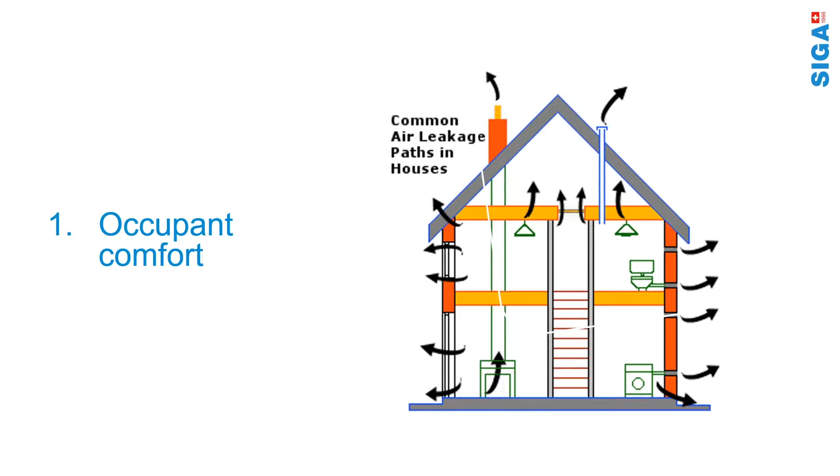Absolutely possible as well. So let's start with the question, why should you pay attention to airtightness in the first place? Okay, what are your benefits? What's in it for you? Why should you even consider doing that? The number one reason to build airtight is occupant comfort. Only if you live in an airtight house that is free of any drafts, you will have maximum comfort. So that's a very important, almost universal value, I would say, for any homeowner. He just wants to be comfortable and not feel any drafts in winter or summer.

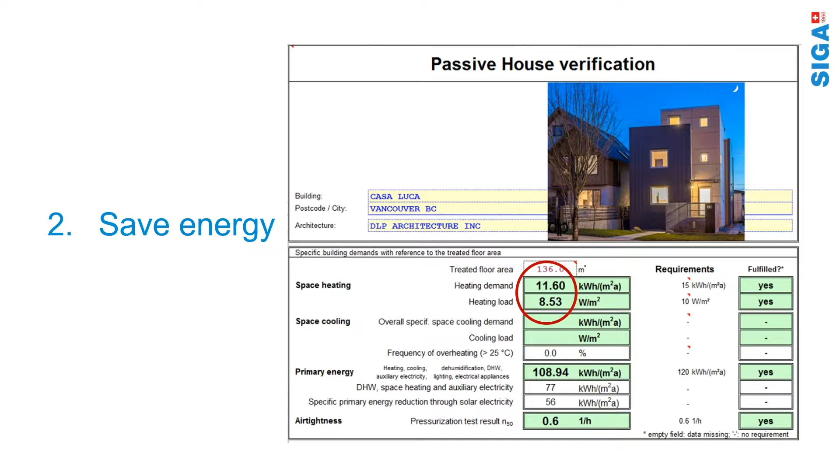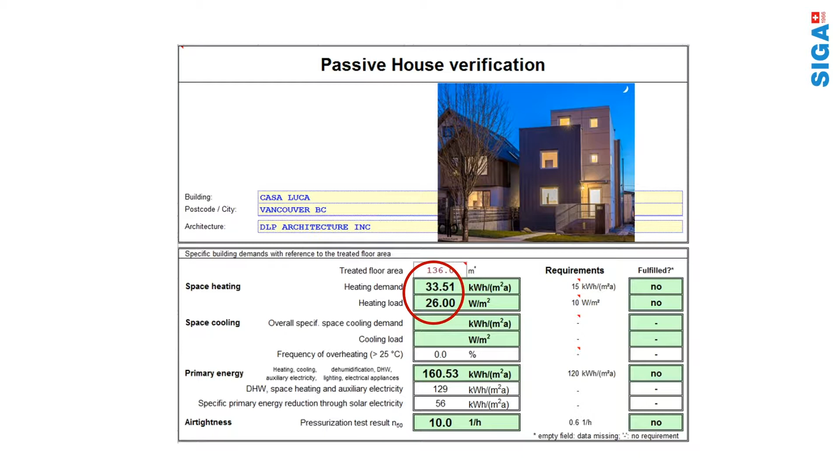The next reason is to save energy. Here we look at the energy model that was done for this house in the picture. And what the modeler did here, he wanted to show to the homeowner that there is an energy saving if he builds the home more airtight. Right now, this house needs about 11 kilowatt hours per square meter at 0.6 air exchange. So that's the passive house level. That's like the gold standard. Now, if we compare this to an airtightness level that is not as favorable, let's say 10, you can see with an air exchange rate of 10, we just tripled our energy demand for this house. So there is a huge saving potential if we build airtight.

Number 3, to avoid building damage. An important part of building airtight is to make sure we have no uncontrolled airflow through our wall or through our assembly. It can be a roof as well in general. Why does this matter? Well, very simple. With air, also moisture can travel into our walls. And if we have moisture that meets cold surfaces in our wall, we always have a condensation risk. And condensation will commonly lead to mold in the long term. So to avoid building damage of that nature, we will have to build it airtight and seal it off well.

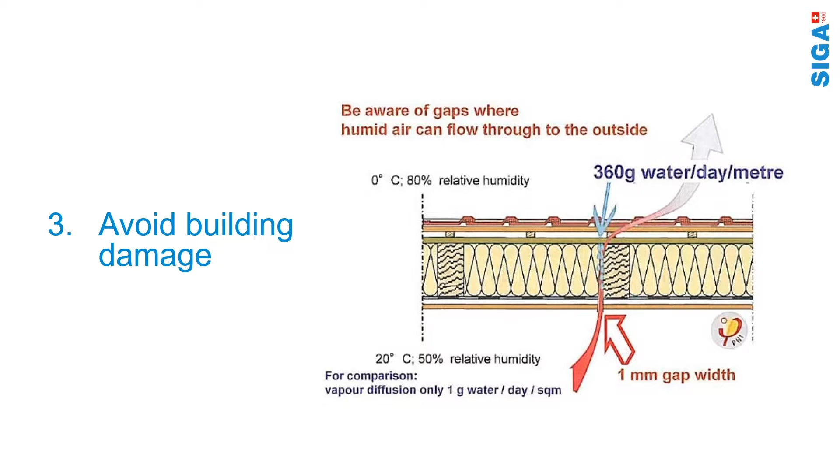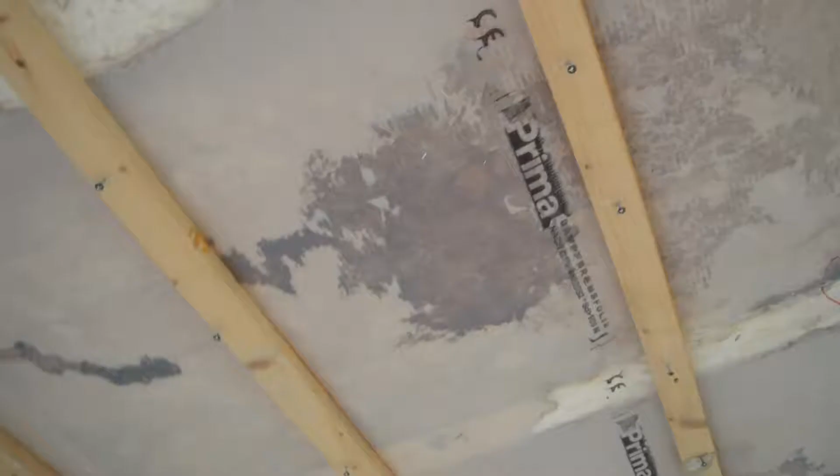Here we have another example of moisture. Here the reason is actually convection. So what happened here, this vapor barrier wasn't properly taped, and the warm air had a chance to get behind it and condensate, and we can clearly see all these water spots, wet spots.

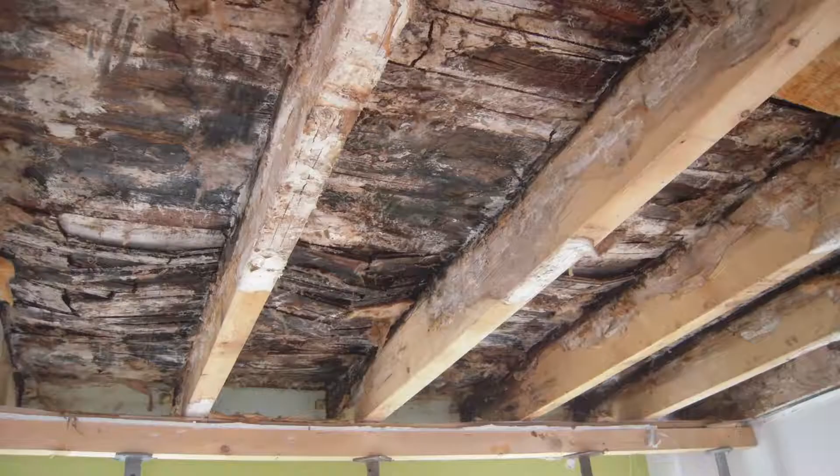There is a lot of moisture that got into that ceiling. What can happen is this, and that's a very severe example of an untreated moisture problem. Next, mold will follow, and with mold over time, it just eats away, it rots away your wood. You can end up being at a point where you're going to have structural issues, and then it becomes not just a health risk in terms of breathing, it becomes a health risk to even be in that building because it could collapse.

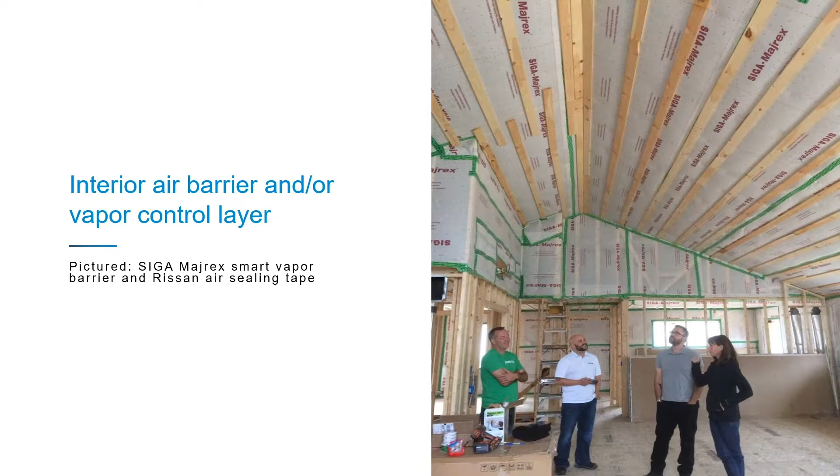So now, after looking at why it's important, let's have a look at how it gets done and what are ways to get your project airtight. One air sealing strategy is actually to address your air barrier from the interior. In this picture, you can see a white membrane called SIGA Majrex. This is a smart directional membrane that's used here to protect your walls from any warm, humid interior air. So it stops it at the source, and therefore is a great choice for all projects, for example, where you plan on using blow-in cellulose.

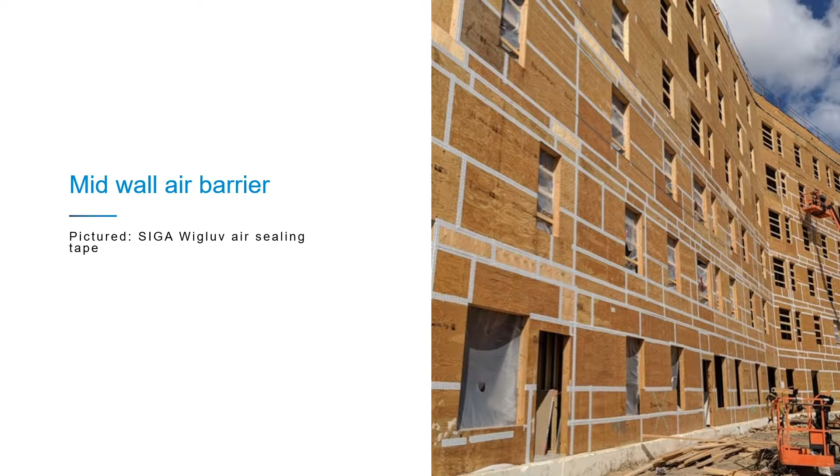Another approach is to have an air barrier mid-wall. In this case, what the contractor chose to do was to tape his sheathing. So we have here plywood sheathing and all those white or white-gray tape lines that you can see, that's Wigluv. So by simply taping all those joints, they were able to create a good airtightness for that building. It's also an approach that has the advantage that it is long-term well protected. There isn't so much a risk, as if you have an interior or exterior barrier, that it gets damaged once it's covered up. Okay, it's a little bit hard to get to.

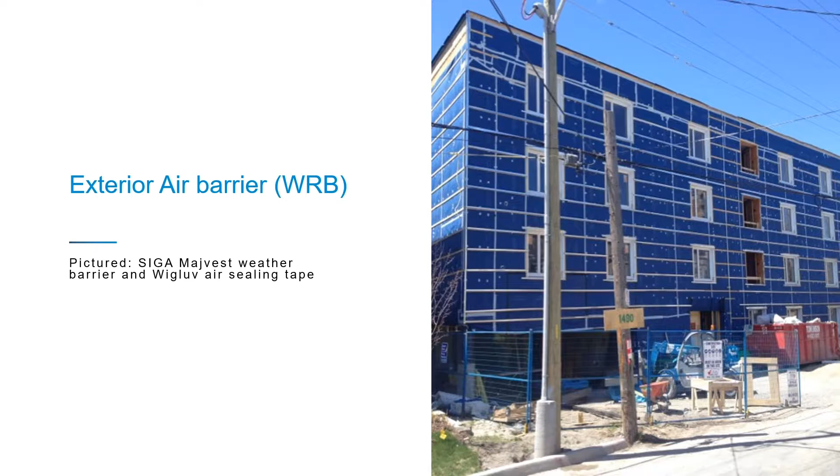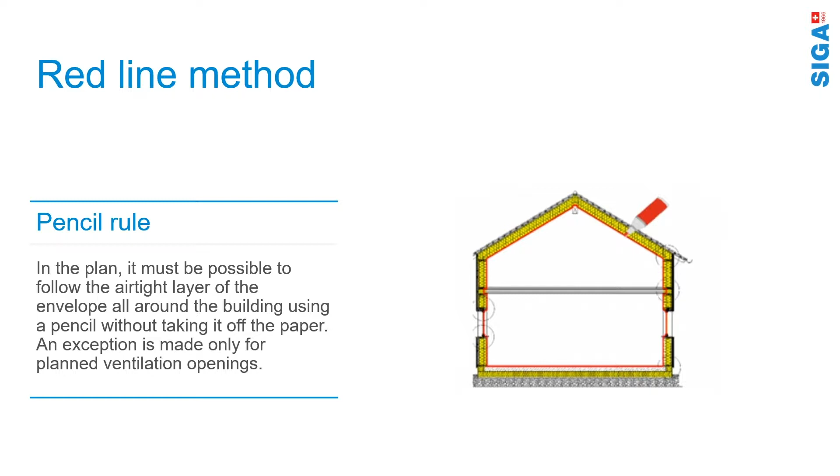A very important element of creating an airtight envelope is to start with the question, what's your project goal? How airtight do you want to be, and how do you get there? By applying different methods. One method is called the red line method, and it's relatively simple. If you look at your plan, you take a red pen and you follow along every single element. So that starts from your base joint, over your window connection, and then you go through the roof, and you really want to make sure and ask yourself, is it airtight, and how are you going to create that? For example, with a window, the glass will be airtight, but then how is the frame connected? If you have penetrations, how are those sealed? So that's called the red line method.

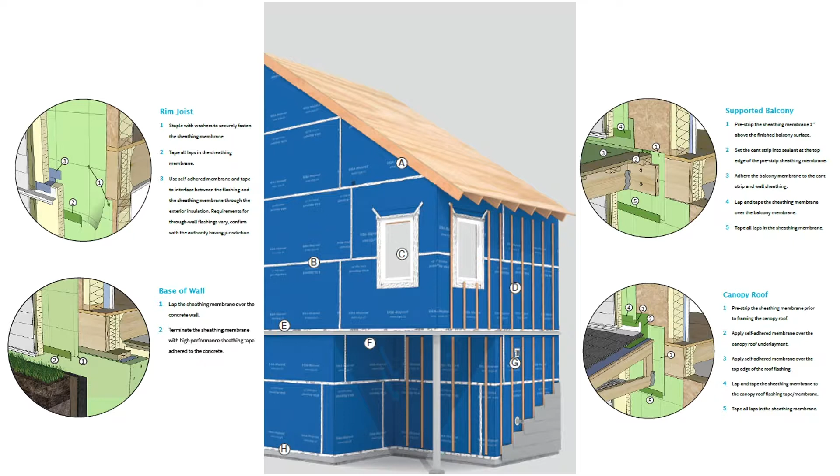Then, talking about different details, another element is to really start to think about tricky details, such as rim joist, base of wall, supported balconies, canopy roof. There are a lot of tricky details where you really have to think in advance how am I going to air seal those before you're actually starting to build, because certain details are going to be really difficult to get to. For example, the top plate of your wall is going to be very difficult once the trusses are already set. It's much more time consuming to tape around trusses rather than just to apply a short sheet of membrane during construction.

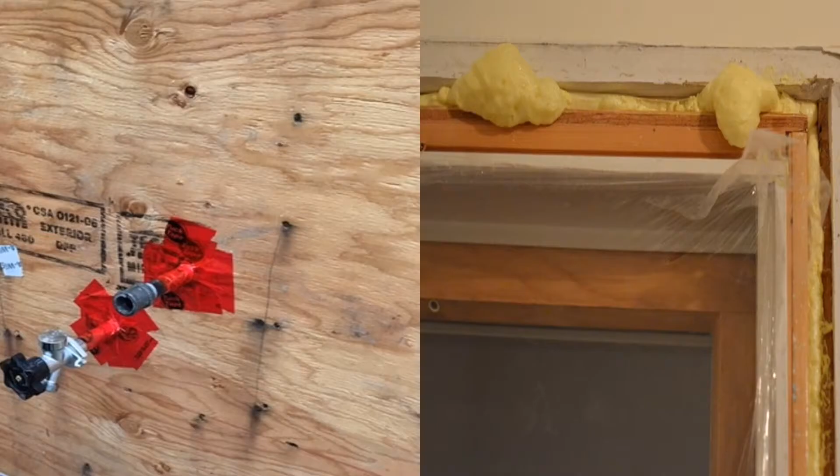Other products that are used in the market are, for example, foam. Here on the right side, it's a spray foam. It has been used to seal the window cavity. And foam is a great insulator, but not a great air barrier. Why? Because foam has a tendency to crack over time. It is not a product that stays the same over time. It starts to shrink, and with it goes the airtightness. So definitely something to think about. Also, if you look at tapes, are these tapes designed to withstand building movements over time?

Is it flexible enough to be used, for example, around pipes, or did someone just really stretch them very hard? So these are questions you have to look at.

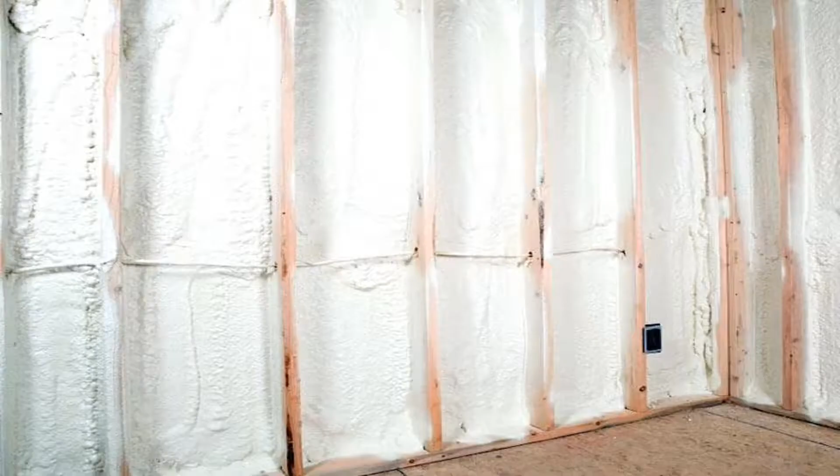Here we have another example we see on a regular basis in North America. This is spray foam. A few things to point out. First of all, a big question mark is going to be here. If you look at that base plate connection, that one wasn't foamed at all. Also, a question mark that we have here is the thickness of the foam, especially if you want to work with a closed cell spray foam. You need a certain thickness so it will act as your vapor barrier. Is that given or not?

Or here, some other tricky connections that you want to pay special attention to. And then a very common one is here: how is this box sealed, and is that airtight or not? And then here with spray foam, once again, we have a similar challenge. Is it going to shrink?

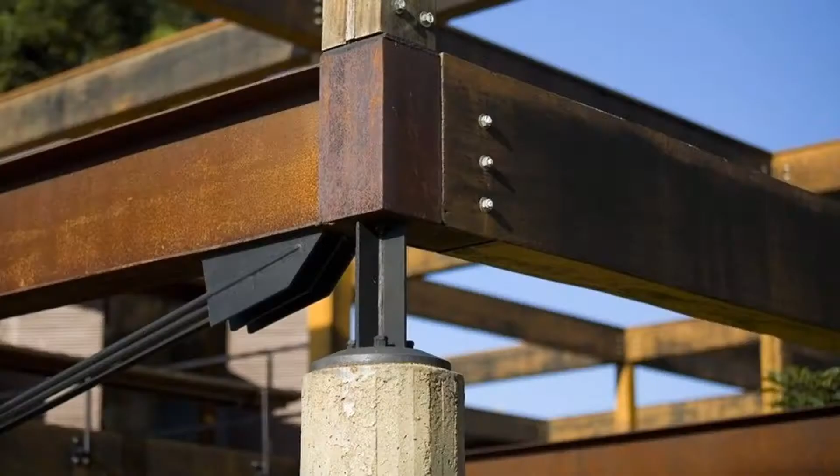Talking about airtightness and different materials, we also have to think about different connections. Are we able to connect steel, concrete, wood, plastic, and so on and so forth? There are so many construction materials, and can the products that you choose really handle this? Do they require special primers or any surface treatments that you may or may not be aware of? So keep that in mind.

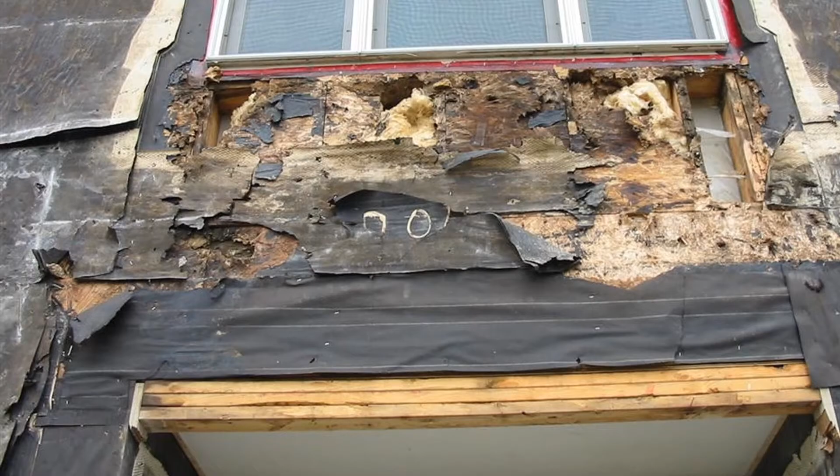UV exposure is definitely also an important point that you want to consider for the product. Can it be exposed to UV over a certain amount of time? Is it permeable enough for the climate you're building in? Or am I going to have an issue there because it's, for example, impermeable? These are all questions. Sometimes it also comes down to sequencing. Was my window installed correctly? Did it maybe leak somewhere? So that we don't end up with pictures like here.

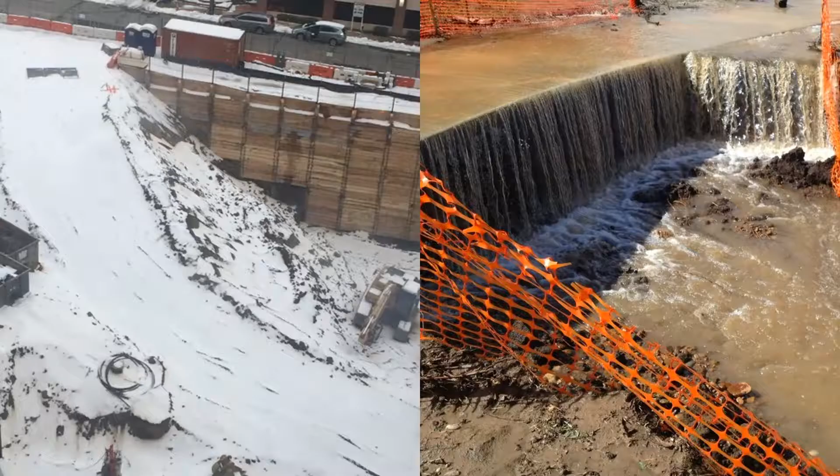Site conditions, part of your planning. When are you going to install it? Is it going to be midwinter? If you are in a cold climate, you do have to consider there are a lot of products that you can't use once it's below 40 degrees Fahrenheit. I've seen installers sometimes using heat guns and trying to trick the elements. You may get it to work or may not.

This is something that's very important. Always make sure that the manufacturer recommended application temperature is followed so that you are covered as well when it comes to the warranty. You don't want to end up in a situation where people say, well, on that day it was actually too cold for you to use it, and you're going to be stuck with an issue.

Also, of course, water and moisture, if you're more in a rainy climate. I hope it's not going to be as flooded as we see here in the picture, but really make sure that you have dry surfaces when you apply the product, so that this is going to be a long-term good installation.

That brings me to what preparation is needed. First and foremost, take the guessing game out. There is a bunch of information out there from manufacturers. In our case, we have installation guidelines, instruction manuals, videos, blog posts, and in some cases the manufacturer is just a phone call away. Just pick up the phone and ask if you're not sure. Don't guess. There is a lot of information there. Make sure you use it.

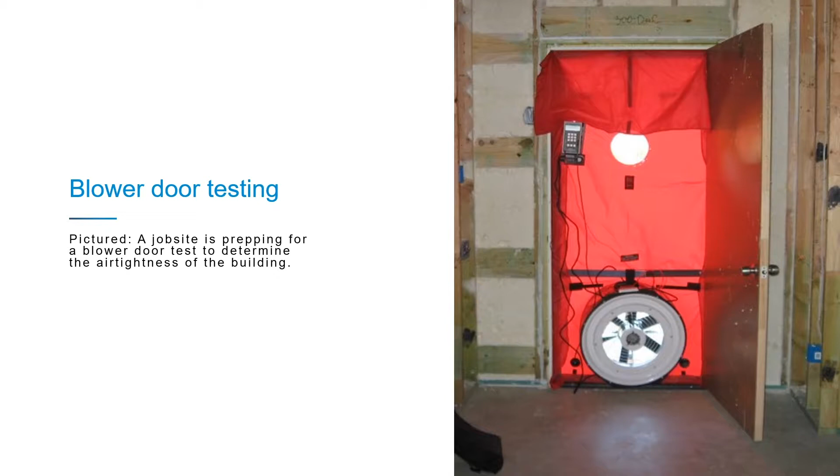If you do a blower door test mid-construction, you get a chance to fix it. Sometimes it simply means putting another tape over an area that you may have forgotten, and you're done. The final blower door test is once it's all drywalled in, once the building is kind of finished, and you won't be able to get to certain points so quickly, and therefore always make sure you do two tests.

So to sum up, material selection and proper product installation is key to building airtight, and there are three P's that you need to remember: pick the right product, plan ahead, and then prepare well so that you know exactly what to expect and how to do it.

So now that we have covered our 3 P's for building air and weather tight, let's jump into installing our weather resistive air barrier as well as pre-flashing our rough opening. Today we are going to be working with a mechanically attached membrane. It's called the Siga Majvest. Siga Majvest comes in 2 sizes. The one size here, that's actually a 5-foot roll, but it also comes in a 10-foot roll.

The product is very durable because it is manufactured with 3 layers. You have a protective layer on each side, and in the middle, like in a good sandwich, kind of the main part is a membrane, and that membrane protects the building from any water infiltration, and at the same time, it is permeable. So this product has a permeability of 54 US perms, and that allows your wall to dry out very quickly and efficiently.

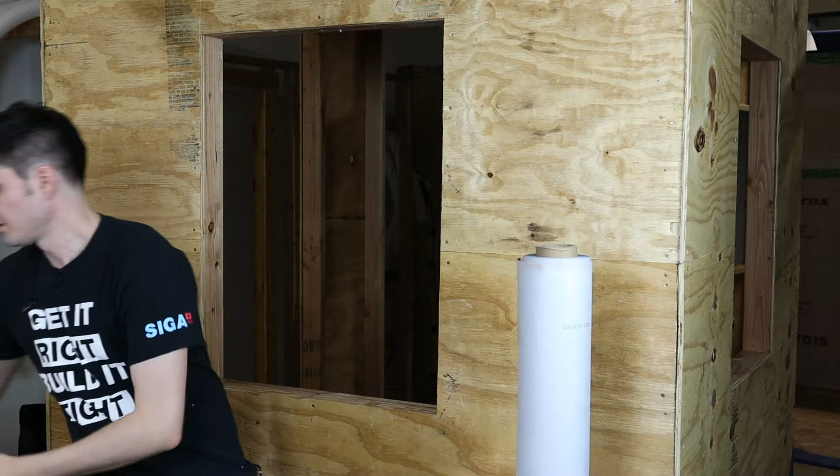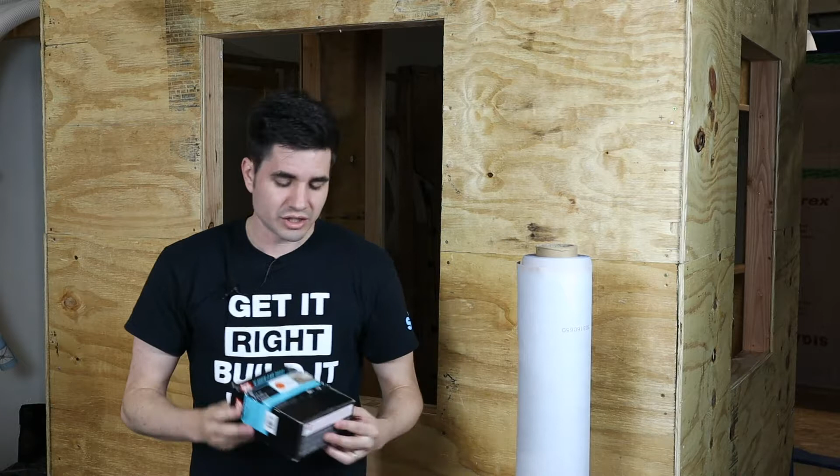To install Majvest, you will need a few tools. One of the most important ones is actually our guideline, which covers almost every detail that you can imagine. Next, you want to make sure you have a tape measure, a chalk line, a cutter knife, a stapler, then something to permanently attach it, for example, plastic cap nails as an option. And last but not least, you're going to need a hammer.

First step, we want to establish a level. And today we're going to work with a 5-foot roll. Therefore, I'm going to measure 5 feet. Okay. All right, there we go. Okay. And by simply using a chalk line, I connect those, and voila, here we have a perfect line for straight installation.

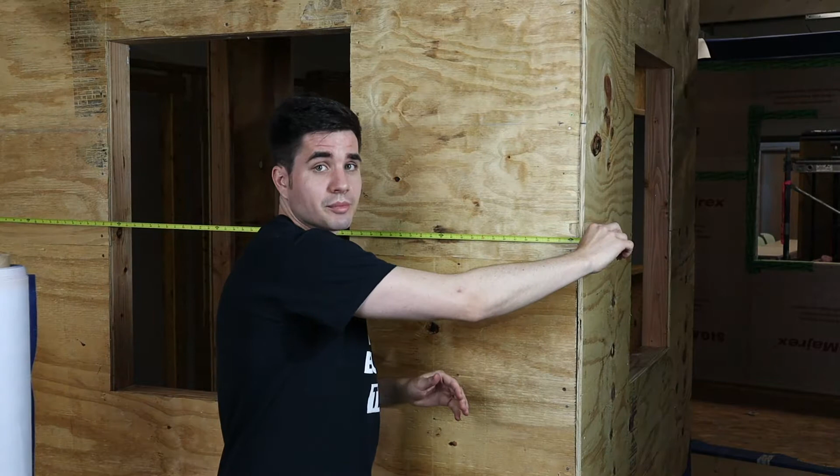Next, I'm going to measure our wall, and based on the measurements, I will pre-cut Majvest to length. Once I have my wall measurement, I will add a minimum of 4 inches on both sides, because I will wrap the Majvest around the corner to create a continuous seal. So with my measurements in mind, I can now go ahead and cut Majvest to length. What comes in very handy when doing so is the Majvest has a 4-inch grid in it. So with that, I don't even have to measure the membrane. I can just visually see where to cut.

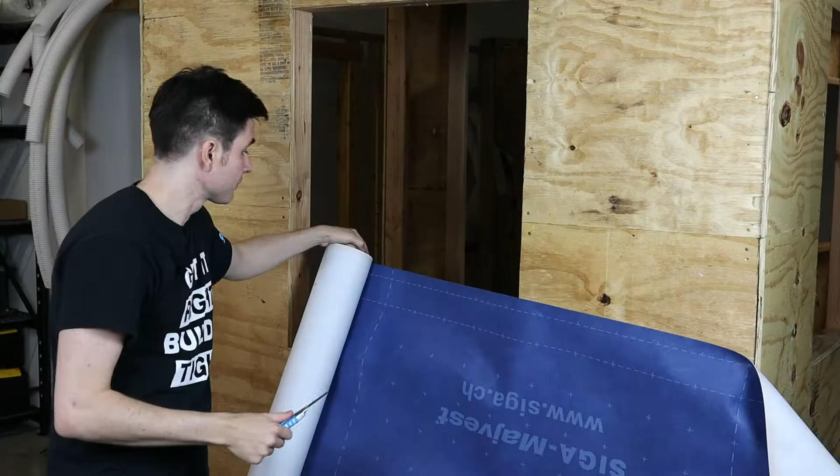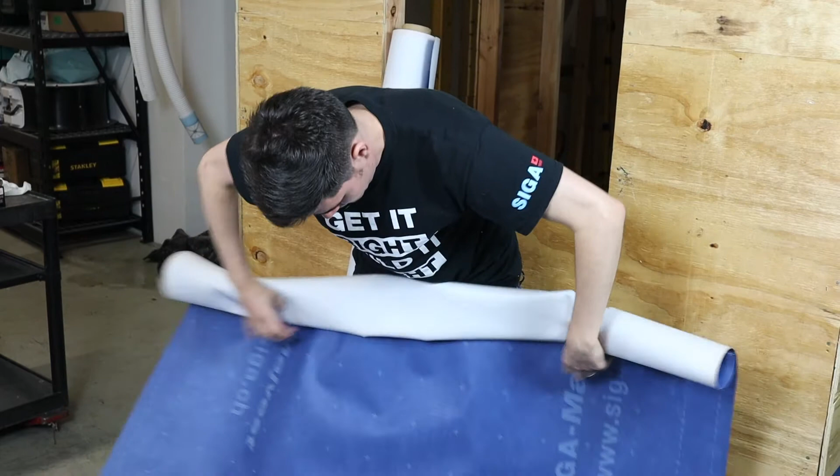And a little trick before we start cutting, I don't start on the top here. I actually start about 1 inch below, and that gives me a lot of stability when I'm actually cutting the membrane. All right. Now the next step for a good installation is to roll it. Voila, here we go. And now we are ready for our next step.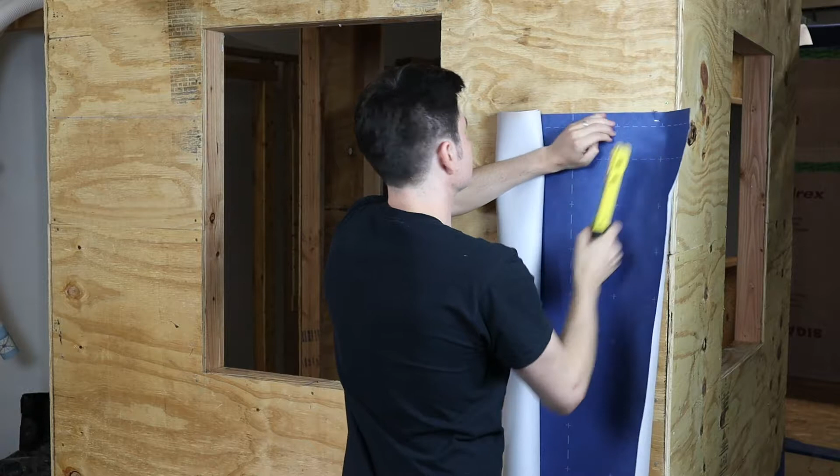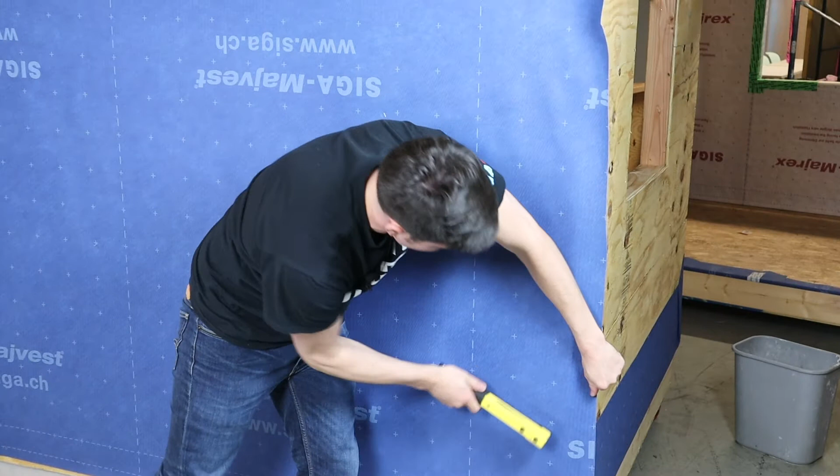So with my pre-cut piece, I can now go ahead and install it on my wall. To do that, I'm gonna use a stapler. So as you can see, I'm distancing my staples around 24 to 36 inches apart. The purpose of this is to temporarily fasten my weather resistive barrier.

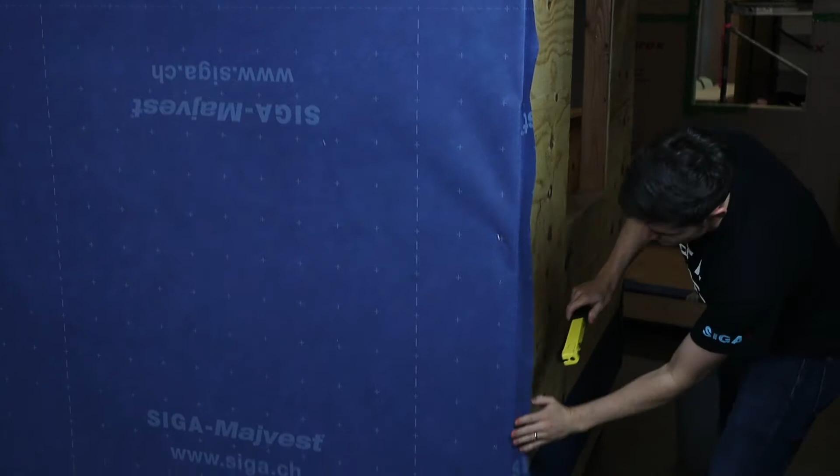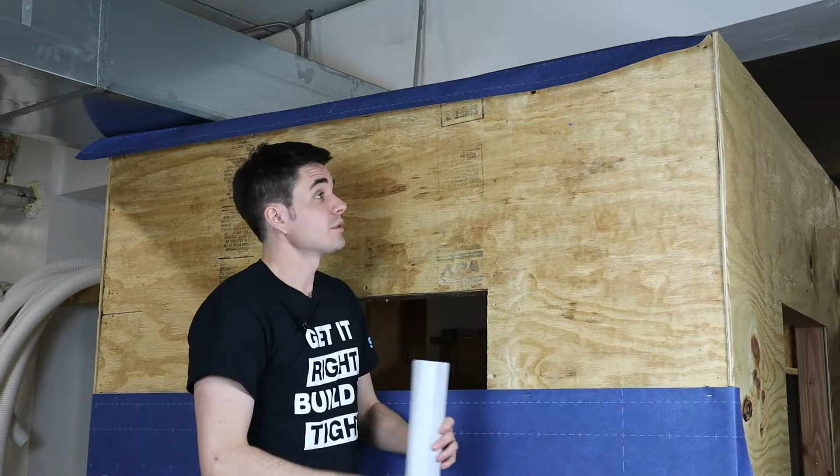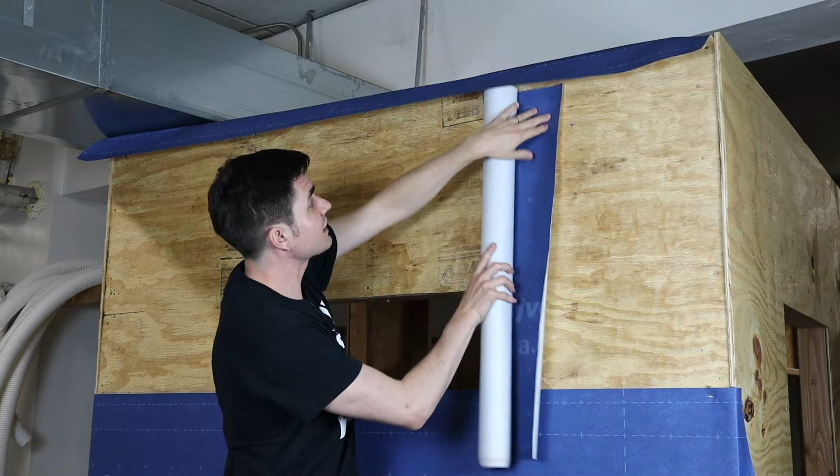So next we are going to install our top part of our Majvest, and let me get up here. Quick detail I want to point out, and that's actually very crucial for your air sealing. On our top plate here, before we set our trusses, we have installed a strip of Majvest. It extends 4 inches to both sides, and the goal here is we're going to connect it with our field membrane here, and with that we will create a continuous air seal throughout that intersection of the building.

And I've pre-cut the piece, and I made sure that we have enough material for our 4-inch overlap. That's the minimum we need for vertical and horizontal overlap like this one. And then on top, once this is installed, we will just fold down our pre-strip there. All right, so let's go ahead.

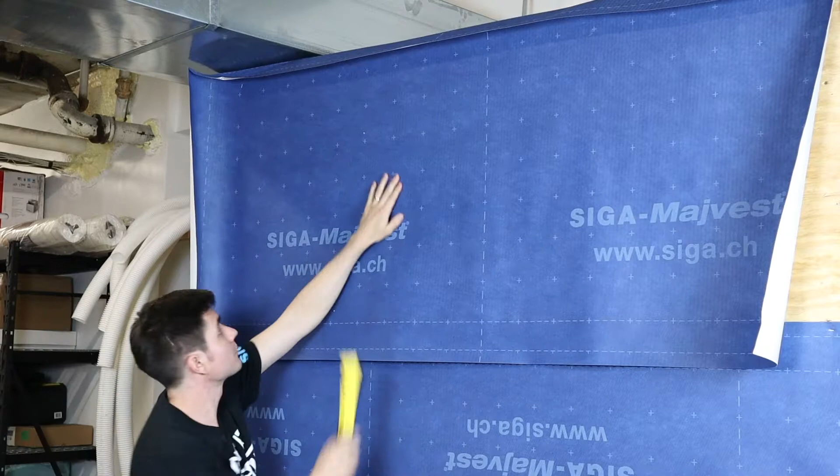Okay, so now with our WRB temporarily installed, we are going to air seal the overlaps, and our first overlap is going to be the middle overlap here. For that we're going to use a tape. It's a 2.4 inch wide tape. One quick trick though, you probably will notice this roll is big enough to fit around my arm, so this comes in handy when I'm going to install it.

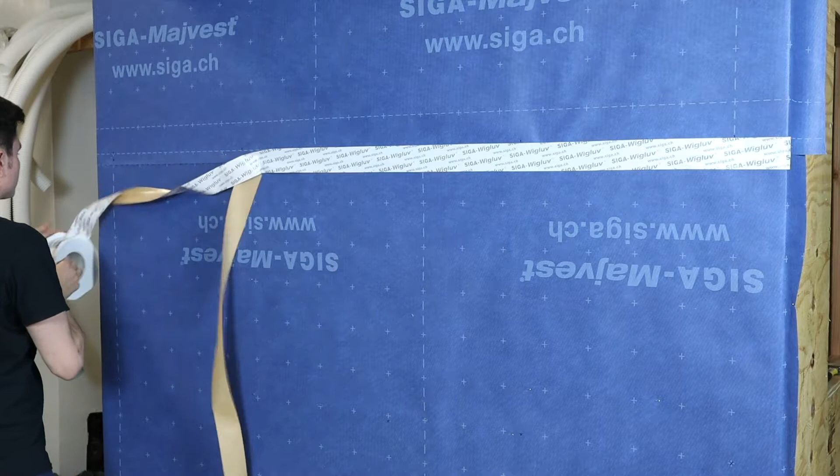What's very important, this is a pressure sensitive tape. What that means is we do have to roll it on well. If we don't, you get things like that, and water could potentially jeopardize our seal here. So make sure you put good pressure on, for example, with a roller. Okay, perfect. Now that's permanently sealed.

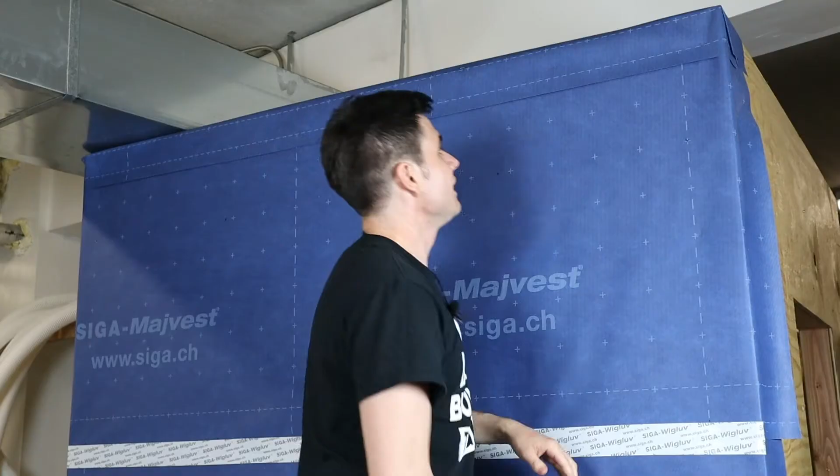The next one is going to be our top sill here. So remember, very important connection. We have here our strip that comes from the top sill.

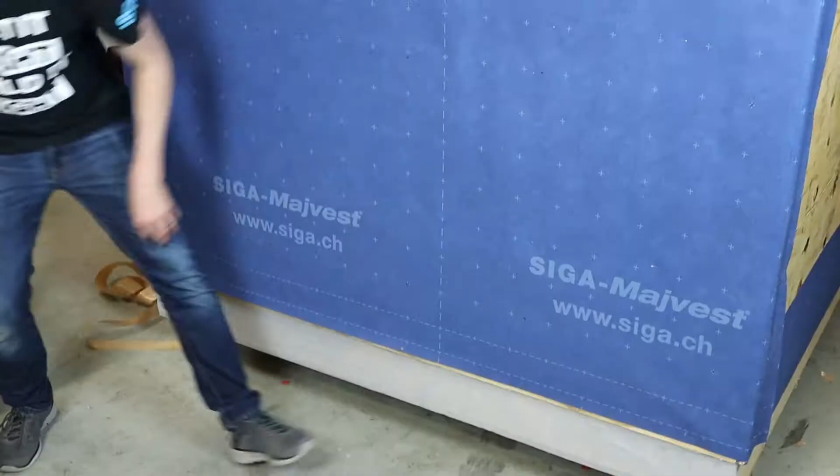Grab my roller one more time, and also here make sure we get a good squeeze. Now we could think we are done, but we are not. There is a very important detail that I see often gets forgotten on the job site, and that's actually the base joint. So as a base joint, we refer to the connection where our wall meets our foundation.

Our foundation is often concrete, which poses an additional challenge. Why? Well, concrete is not a great substrate to stick to. It's usually dusty, and so a lot of tapes require primer. Double check if the tape you are going to use needs primer. Our SIGA has a tape that doesn't require any primer. It's called Fentrim. For this application, we're going to use the Fentrim 4-inch.

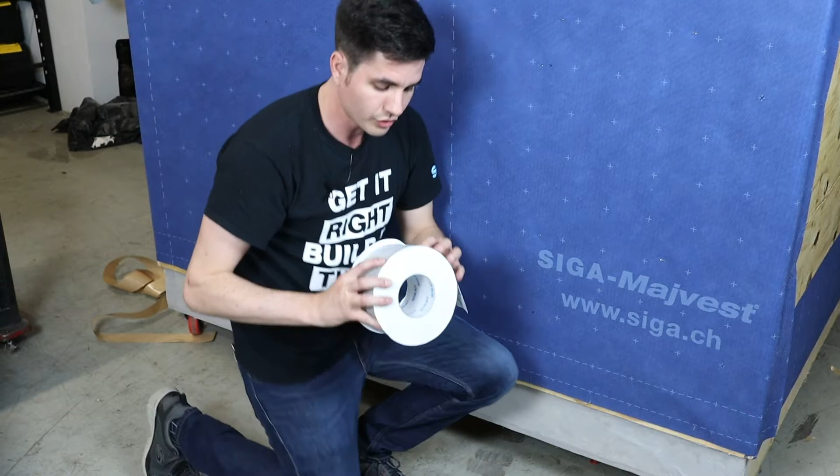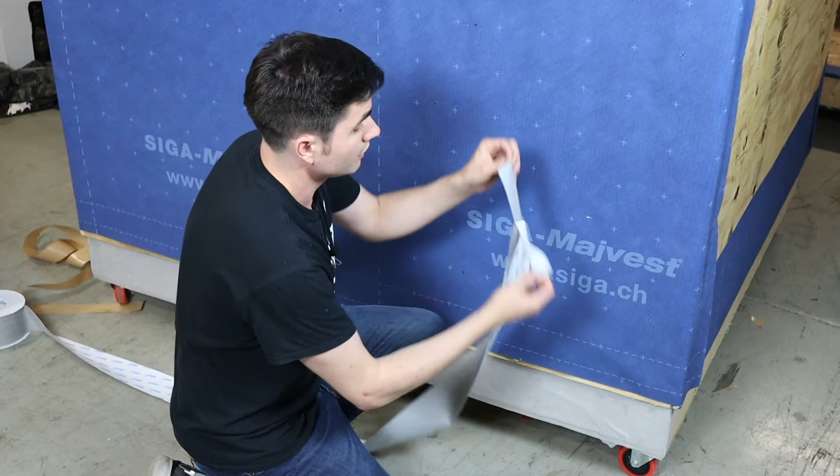The minimum tape width we need on concrete is 2 inch. And thanks to this split backing, that's going to be a super easy install. We want to start with the bottom part to ensure we have that minimum width. Fold it along the split backing, and then we can nicely squeeze it underneath here.

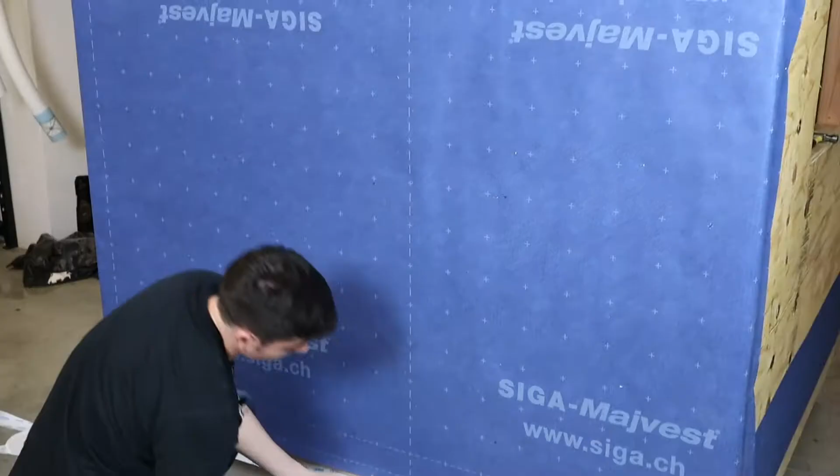Once again, here we want to make sure we put some good pressure on the tape. For that application, I actually really prefer the squeegee over the roller. We're going to remove the second backing paper, run it along our sheeting here. Okay. And now we're going to do the final taping, very simply fold it up onto our weather resistive barrier. Give it a good squeeze.

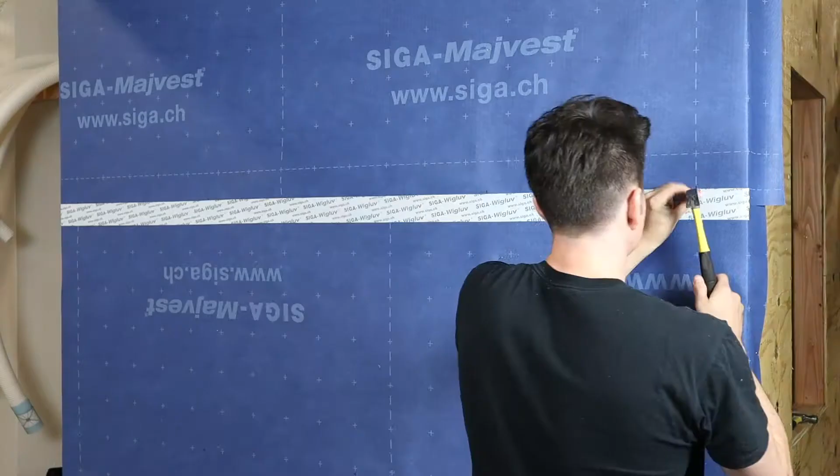All right, so from an installation point of view, we will consider this a temporary installation. We want to make it now permanent, and how we do that, there are multiple options. We can, for example, install battens that will also serve as a rain screen later. We can use cap nails or cap screws. For today, I choose cap nails. It's going to be quite an easy install, and let me show you how that's done.

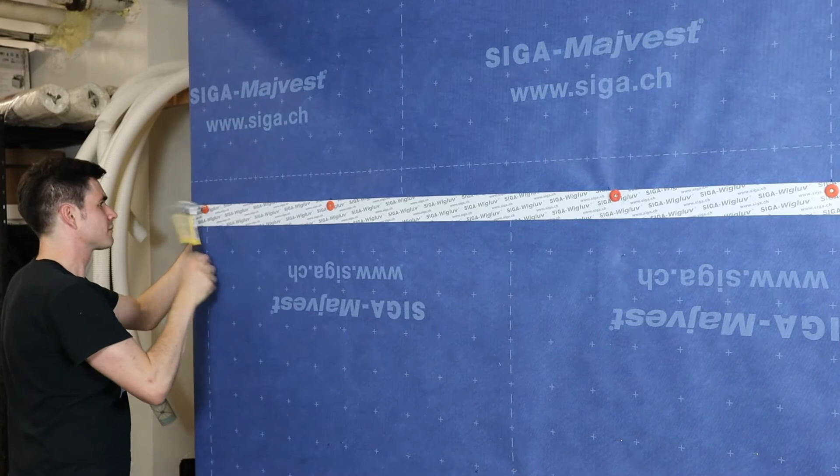So the typical distance between these cap nails is 24 inches. It can go up to 36. That depends a little bit on the manufacturer of those products, so ask them as well. Me here, I'm going to go for around 24 inches.

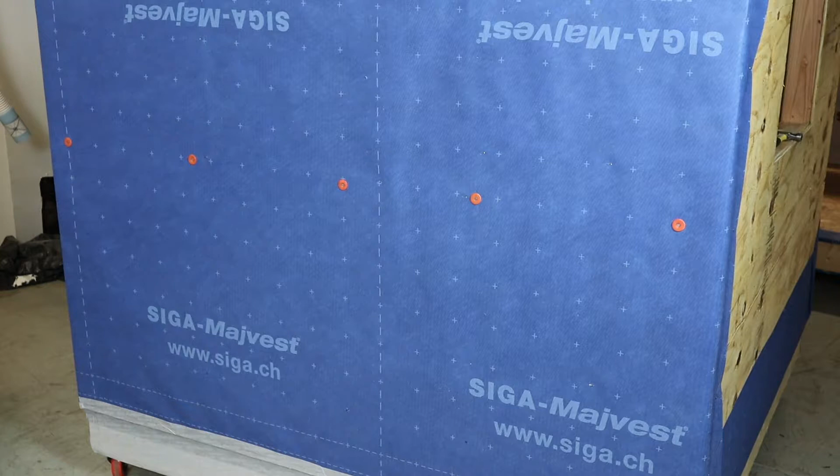All right, so at this point, let's talk a little bit about tape and a few things that you should consider when you're selecting a product. Number one is the adhesive strength. So you really want to work with tapes that are not just working when it's 68 degrees outside, but also when it gets warmer or even more importantly, colder.

Next point is compatibility. Often when it comes to tape, you are connecting different substrates. They react differently, they expand, they contract. You really want to make sure that the tape can actually handle that. Another factor that is important is permeability, especially with a product like this where you build a very permeable wall that can dry. So you want to use for sure a semi-permeable to a permeable tape.

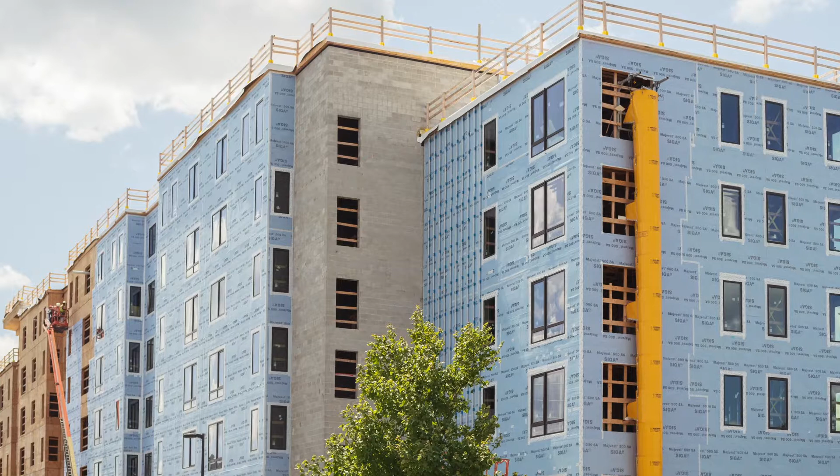And last but not least, we have another weather factor, that's UV. Make sure that the product can withstand UV so that it's not going to fail during the construction or after. We are done with our cap nails now. As for where do we place them? We place them over our studs. So that's kind of an important thing. We want to hit our stud, so mark the studs prior to installing.

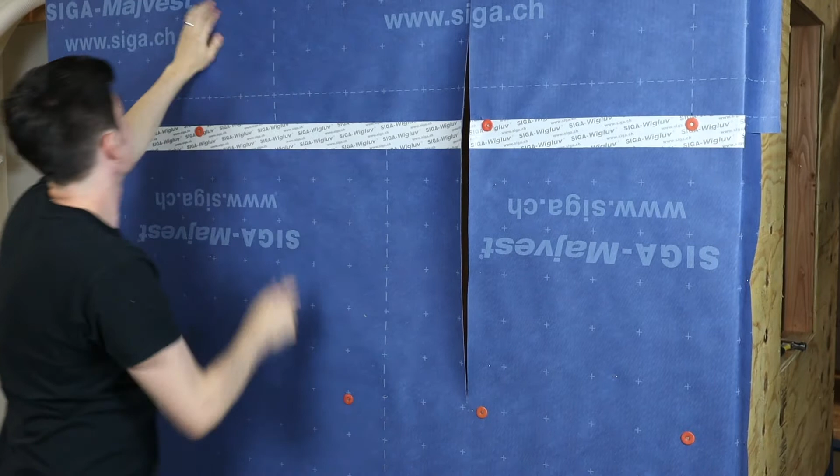So the next step is going to be to cut our membrane. We're going to cut it flush to the rough opening. I typically start on the upper corner here. I find it easier to extend the blade a little and just run it along my interior sheathing. Okay, do this here too. Okay, now the bottom I'm also going to cut flush.

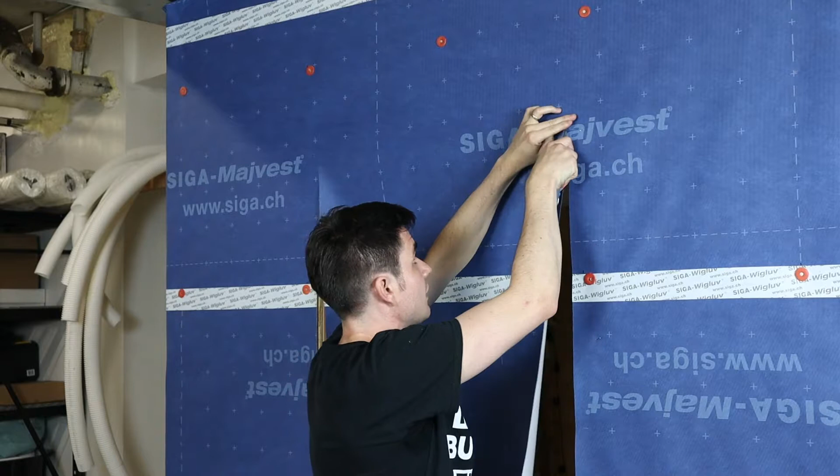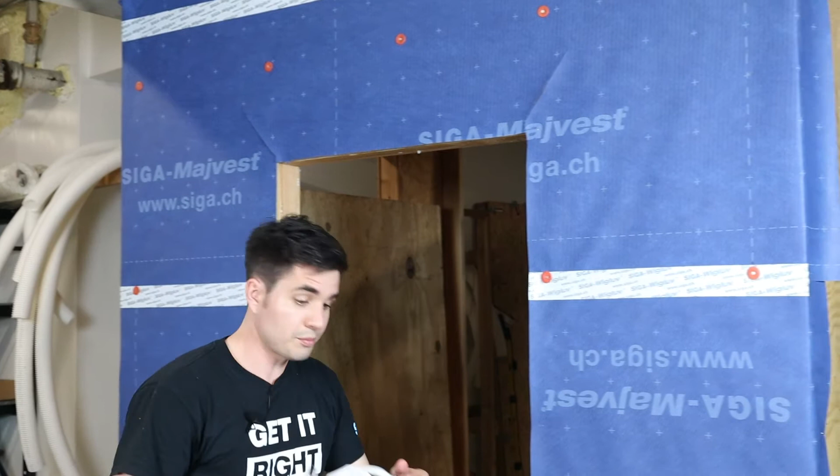For the head, and that's an important one, we want to overextend by 1 inch, kind of that line from before. And then we have to do a 45-degree angle, 9-inch cut, okay? Okay, gonna use a very small piece of tape. And with that tape, I will flap that open here.

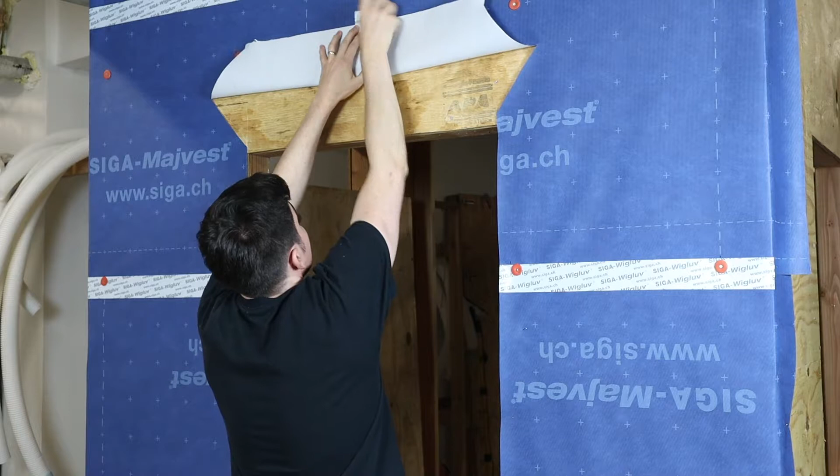Okay. Once the rough opening is fully protected and the window gets installed, we will just take this little flap down and have a very, very good protection for the head of our windows. All right, with that being said, let's move to the next stage, and that's flashing our window.

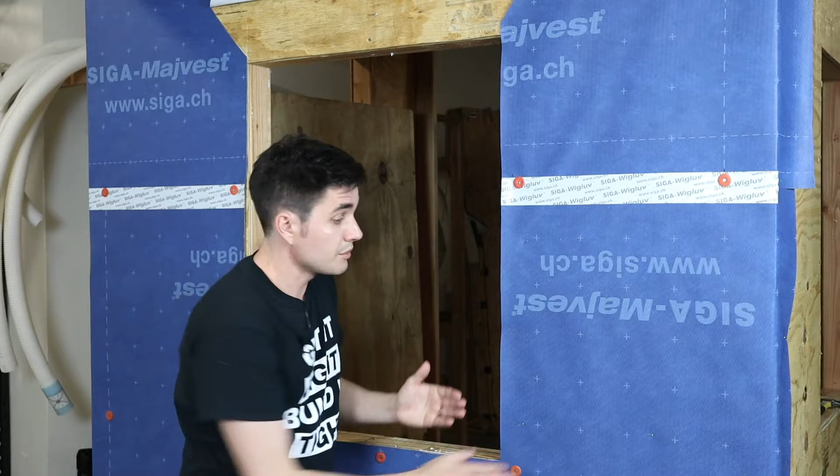Now for window flashing, what's important to consider is, first of all, the sequencing, okay? So we always want to start from the lowest point. And the reason for that is we want to make sure we shingle everything correctly. Now water can potentially flow down our facade. And so for us, goal number one is we really want to avoid any reverse lap.

Because if we have reverse lap, the water can sit there and potentially penetrate our weather resistive barrier. All right, so sill first. How do we do the sill? We use 6-inch tape. That's also Wigluv. It's a little bit a wider version of the one we used up here. And the first step is measuring the rough opening, okay? We want to overextend each side by about 2 inch.

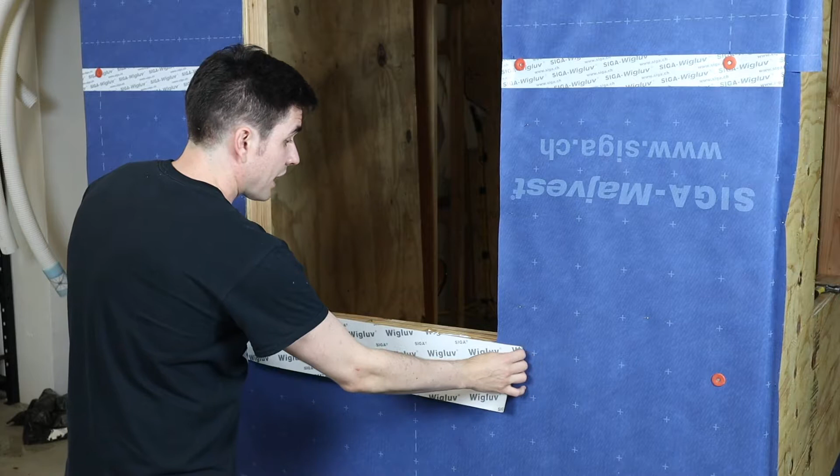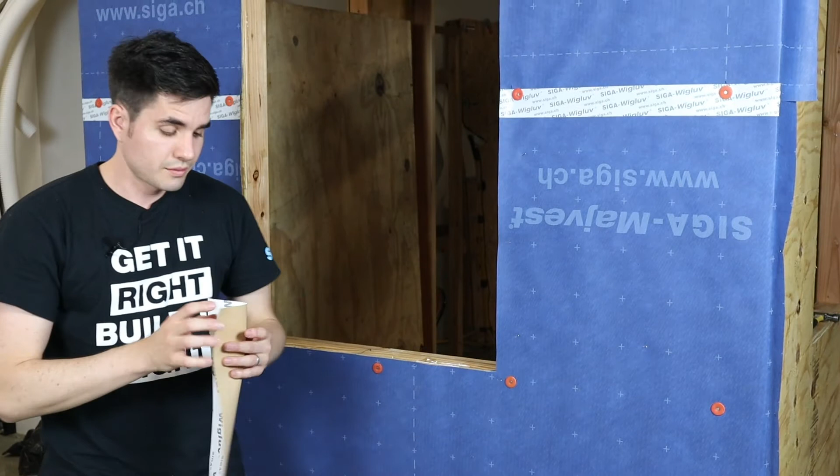In my case, as you can see, I have a few of those cap nails here. So I definitely want to make sure I cover those well. Little tip on how to cut it. For me, the easiest way to cut tape is to kind of take it between the legs and then just make one simple cut. Another trick, this tape has a split backing. That split backing is quite nice because we can work with one piece at a time or one half at a time. And what I found very helpful is to simply fold it along that split backing, okay?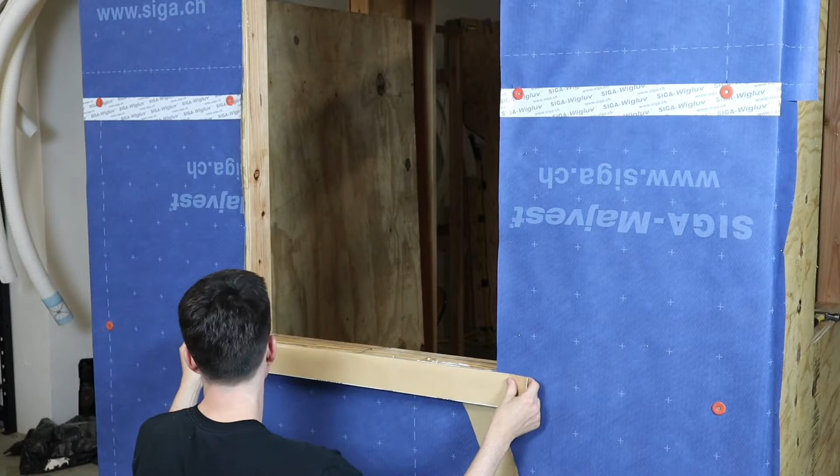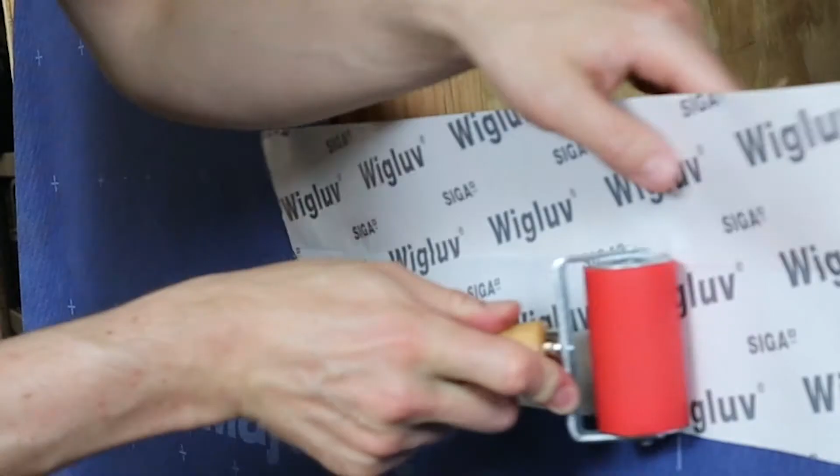And with that, it's not sticky yet, and we can really nicely position this sill tape. That's exactly what I'm gonna do now. Right? Okay. Right. So once again, an important point here is, same as above, we have to make sure we put some good pressure on this tape, really activate that adhesion.

Once that's done, we're going to come to our corner piece. We have to do 2 small cuts, one on each side. And the easiest way to make that cut is not from the top or anything like that. Just cut along that fold. It goes super easy. You basically cut kind of same direction as the wall is. Now we come to the taping. You get the best results if you start from the middle and work your way out into the corners and up the jambs. Also an important tool here is the Siga Squeegee. It will really help you to get nice into those corners. All right, so let's do that.

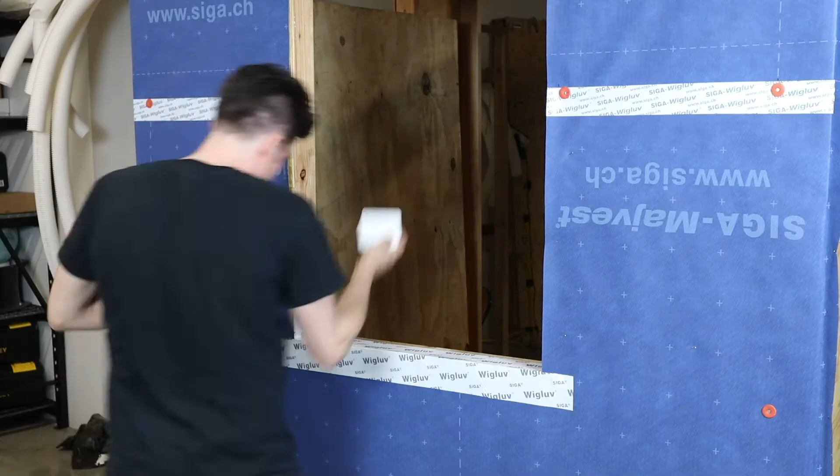I'm going to remove my backing paper here. Fold it nicely, okay? Work my way towards that corner. Use a squeegee, squeeze it nicely in here, okay? Do it one more time on the other side. Okay. Okay, perfect. Give it some rolling, and the first part of our sill flashing is done.

Now we have the second part, and an important part is always the corner, often a weakness when it comes to window flashing. And so we have created a method where you do not need to cut in that area. And how can we do that? So Wigluv is very flexible, and this is kind of the secret how we can do corners without cutting. So let me demonstrate this to you. I can really bend this tape to quite an extent. And so we're going to make use of that characteristic. Now let me show you how the corner is done.

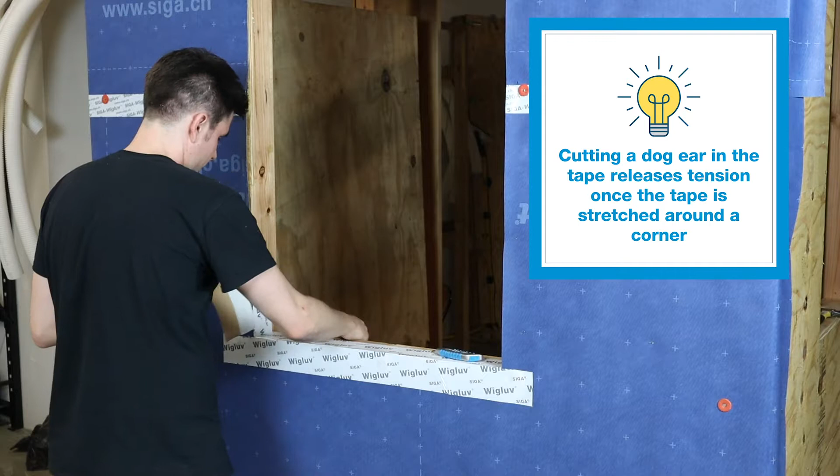So first, we want to pre-cut a piece. We're going to do the width of the rough opening plus 3 inches. Then we're going to cut off, kind of, we call it the dog ears. And we are ready to install. Once again, making use of that split backing by installing one side first. Remove the tape, do the second side, all right?

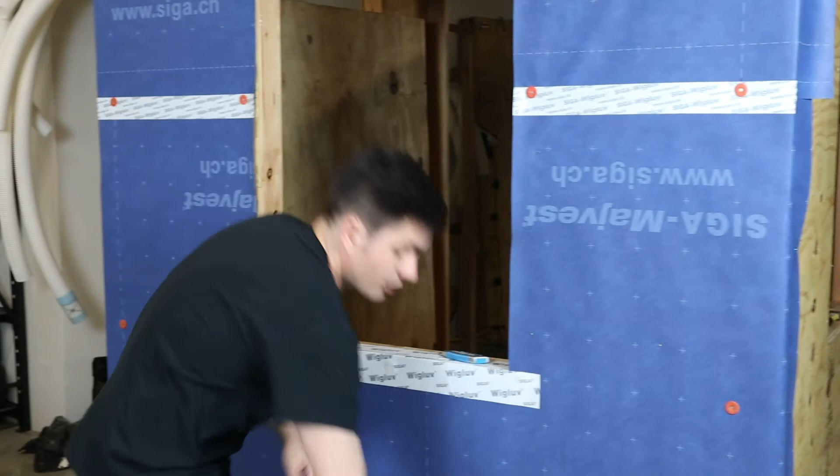And now, when it comes to the corner, there's a little trick. I like to kind of use my thumb and really make sure that right around that edge of the corner we have really zero buildup. Repeat the same step on the other end. Okay, once again, use the thumb a little, stretch it out, and voila.

Hold on. Next, we will address our jambs, the window jambs. For that, in this application in particular, we are going to use the 6-inch tape again, so we switch back. Reason is, the way our window is going to be positioned, we want to make sure we fully cover the entire window once installed. And therefore, we are using a 6-inch. Okay. Here, in terms of measurement, on the bottom, we want to make sure we cover the bottom tape and do about 2-inch on top.

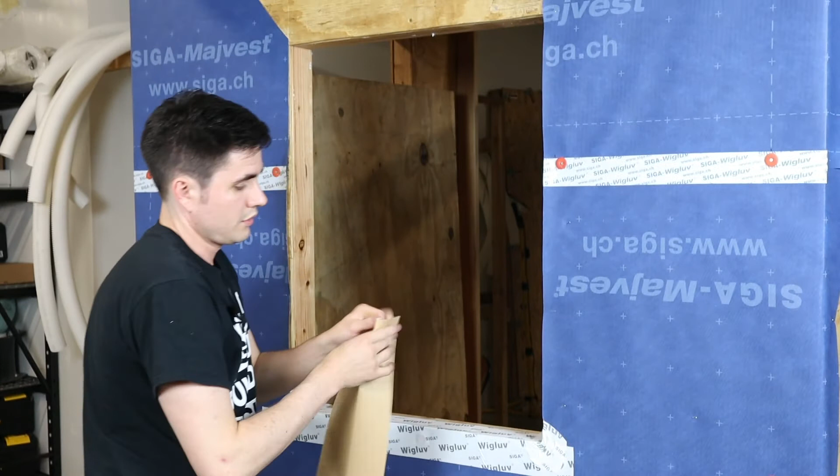Same installation as before, fold along the backing, position it before the full thing sticks, okay? Right. Apply the tape, okay? The 2 cuts.

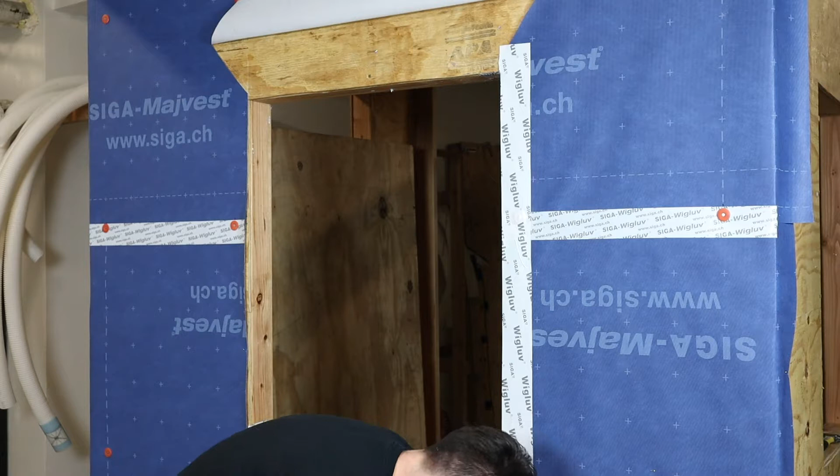All right. Repeat the same step on the other side. Okay.

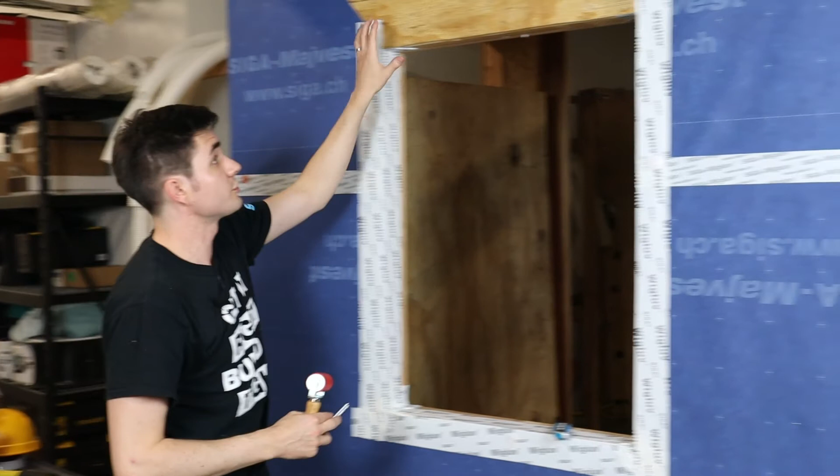Now we have 2 more corners to address. The good news is we do it exactly the same way as we did on the bottom. So one more time, we're going to use the 4-inch. Rough opening width plus 3-inch. Just going to pre-cut both pieces here.

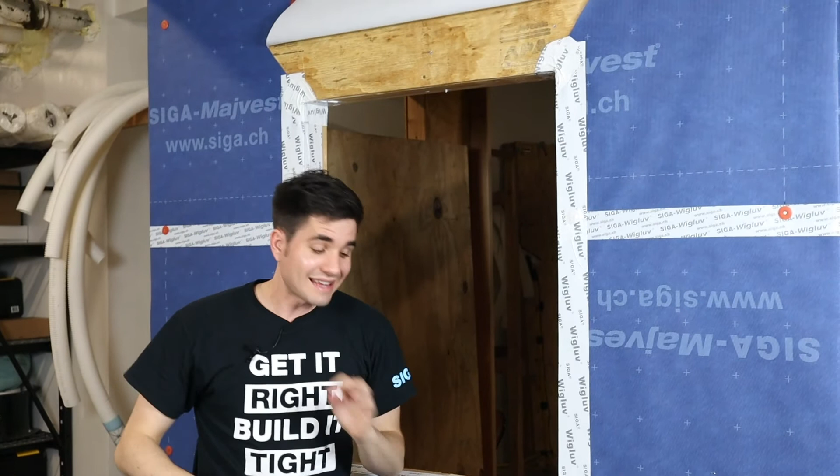Now the last piece that we need for the rough opening is the head. And the head we are going to overextend by 1 inch here so we can properly protect this upper edge here. Okay? So once again, quick measure. Right, oh, that's a little generous. Here we go. Okay, got it.